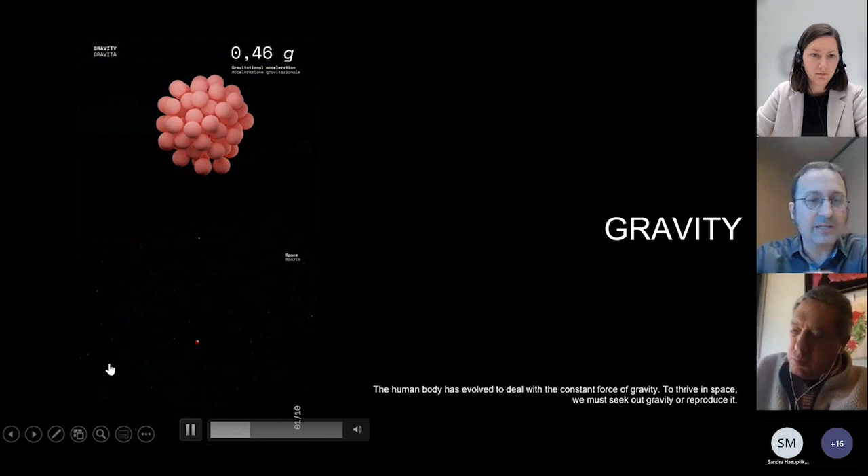So the first one is gravity. The human body has evolved in 1G, but as we go out into outer space, we can experience different forms of gravity: extra G's at liftoff, microgravity, 1/6 G on the moon. These are kind of like the 3 main destinations that we, as space architects, have all thought about: low Earth orbit, which we have a lot of experience with; the moon, which we have some experience with; and Mars, which is only experienced by our robots so far, and hopefully one day humans as well. Each of these spaces has a different type of gravity.

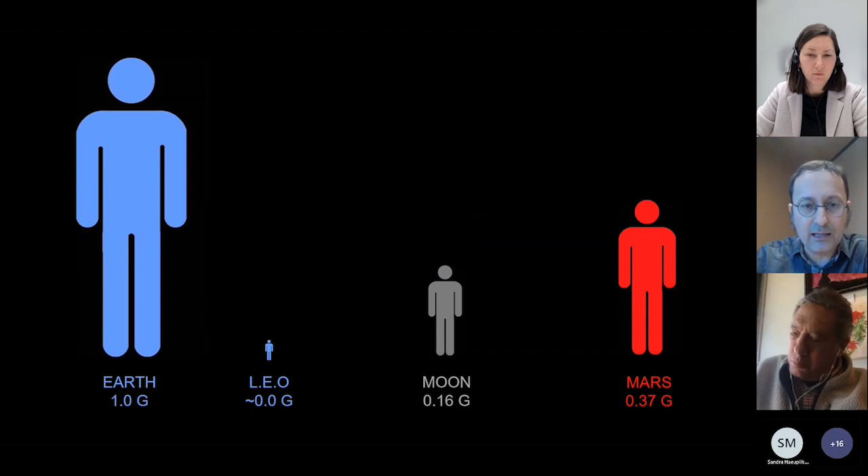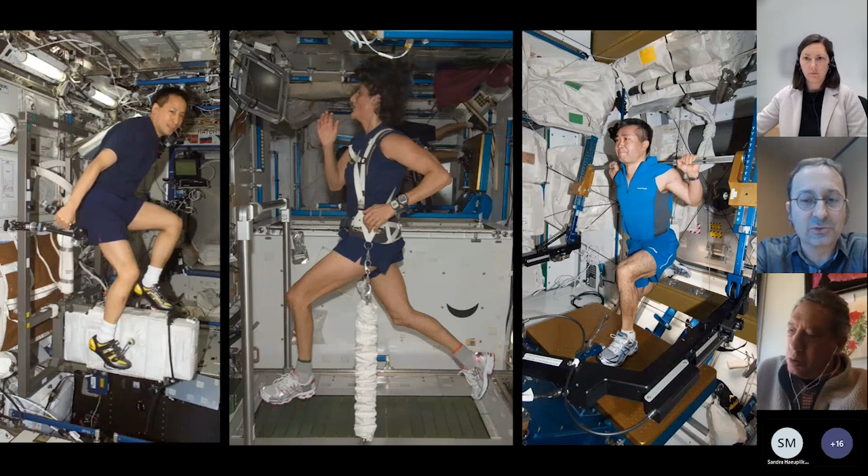In microgravity, in Earth orbit, you're kind of falling with your habitat, so you have this perception of weightlessness, which is a lot of fun, but it's also very detrimental to a human body. So our astronauts spend a vast amount of their time exercising and trying to prevent the degradation from the microgravity.

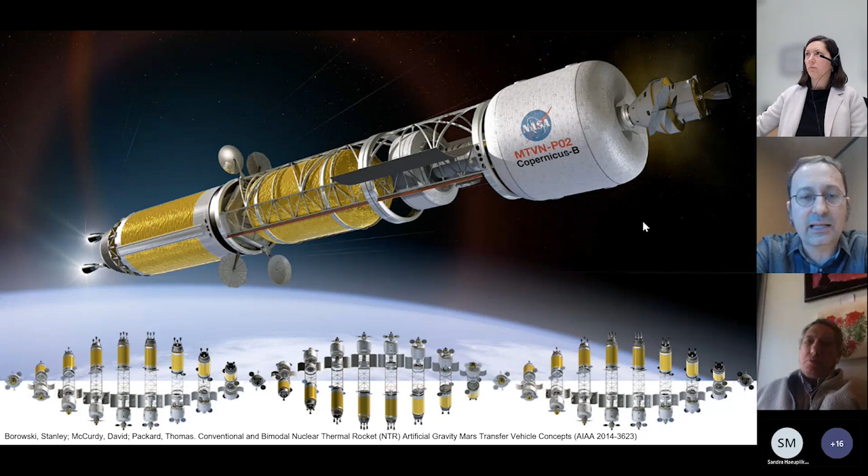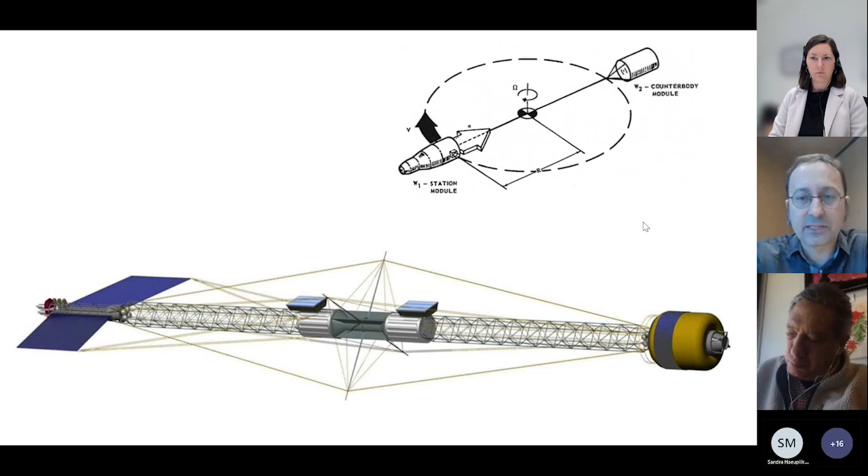Space architecture has been imagined for a long time of how you could combat that, right? One idea is to spin the habitat around and produce artificial gravity—von Braun, 2001: A Space Odyssey, O'Neill settlements. In reality, this has not come to pass, and it probably won't come to pass for a while because of the vast amount of matter you have to bring up to low Earth orbit. More realistically, you would probably use the rocket as a counterbalance and just spin your habitat around. The wider you make it, the longer the radius, the more gravity you could get with a lower spin. So these are some ideas being explored by space architects of how to create artificial gravity.

But once you get to your destination, you have to make sure everybody survives the harsh habitat. On Earth, if there's an issue with a part of our building, our codes, our architects, the goal is to get everybody safely out of the building. If you're on the moon or Mars, chances are that the outside is actually more deadly than any emergency you would have.

And so your habitat has to be resilient in the sense that if there's any issue with one part of your structure, it should not separate or cut off the rest of your habitat from the livable parts. You can't have any single point failures. It should be efficient and easily expandable because we hope to create long-term settlements, not just one-off visits to our destinations. So we've looked at a lot of different precedents in how humans have been constructing new habitats on Earth for a long time.

Grids are popular systems. There's the Law of the Indies, designed basically out of Madrid, that would be applied to all cities and colonies founded by Spain. So if you go to Latin America, a lot of the old cities have this grid lined with the Plaza Mayor in the center, the church and the governor's house, and a radial grid coming out of there. In the United States, west of the Appalachians, there was the law passed by Thomas Jefferson, the Public Land Survey System, which divided all of the land acquired by the U.S. into mile by mile squares that are further subdivided. So the Jeffersonian grid is another example.

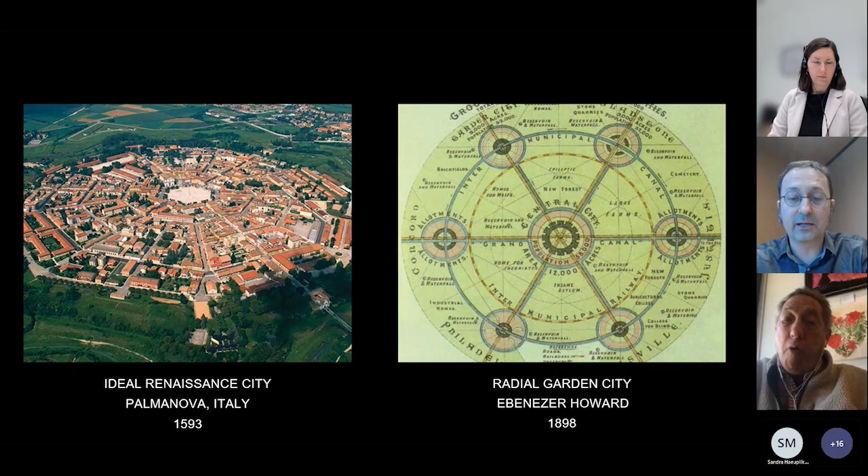We looked at radial cities, the Ideal Garden City by Ebenezer Howard in the Industrial Revolution.

But judging them on all these criteria, this master plan idea of the linear city, first articulated by the Spanish architect Arturo Soria, made famous by Le Corbusier, is very appropriate for outer space. It was an idea of how you could grow cities around all of this new technology, transportation, and infrastructure coming out of the Industrial Revolution, with bands of development that could grow and connect central points.

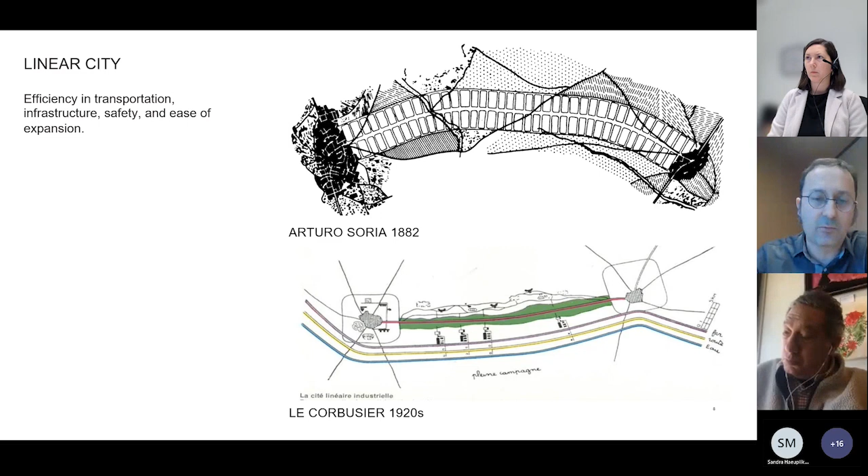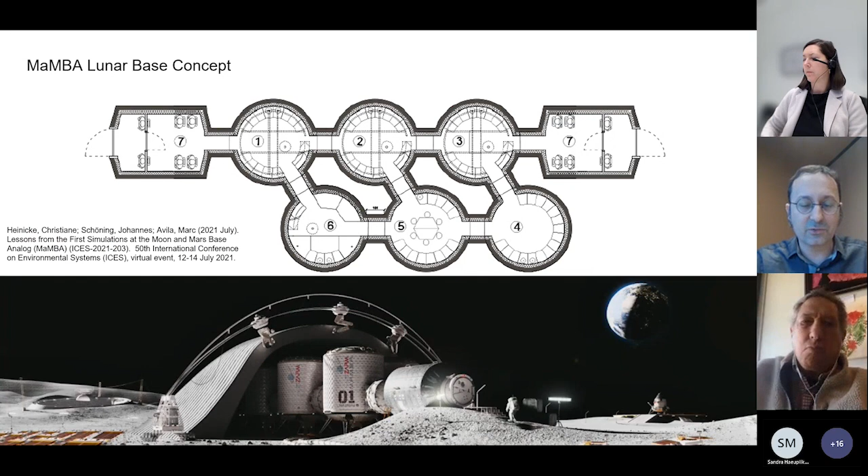So I explored this first on the Mars Home project, and we did have this double band pattern that could expand in each direction, interconnected as often as possible.

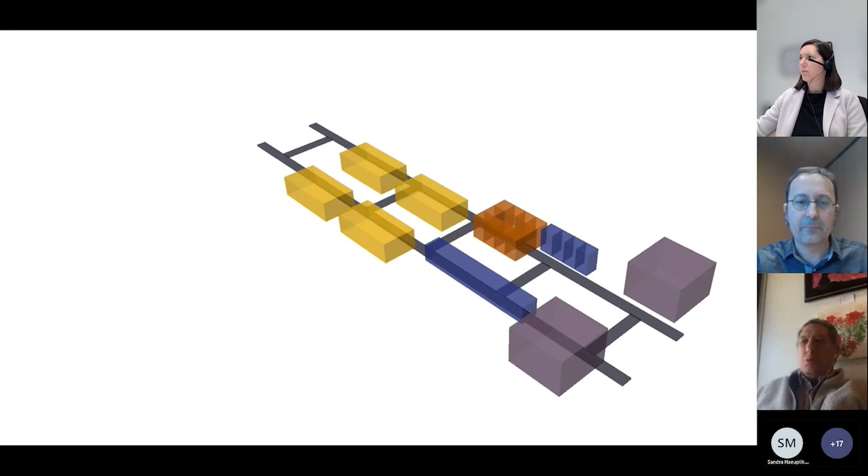We arranged all of the program, all of the different spaces, along these two bands. Part of the idea here was that one of the bands would be buried under masonry structures where the pressure is balanced by the overburden deep in a hill, and then a series of pressurized elements reaching out towards the surface, having access to the vacuum outside. Here's a section of the two bands going in and out of the page.

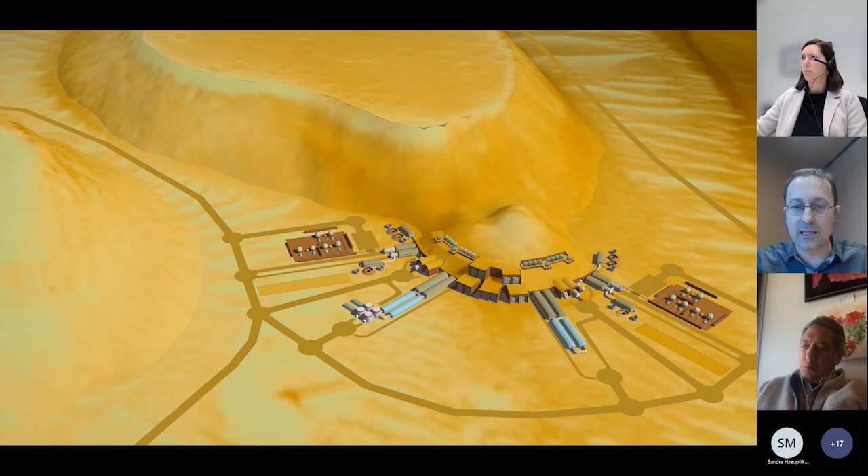If you have your design, it's really easy to keep expanding and replicating this pattern around. In this case, we decided to do it around this hill.

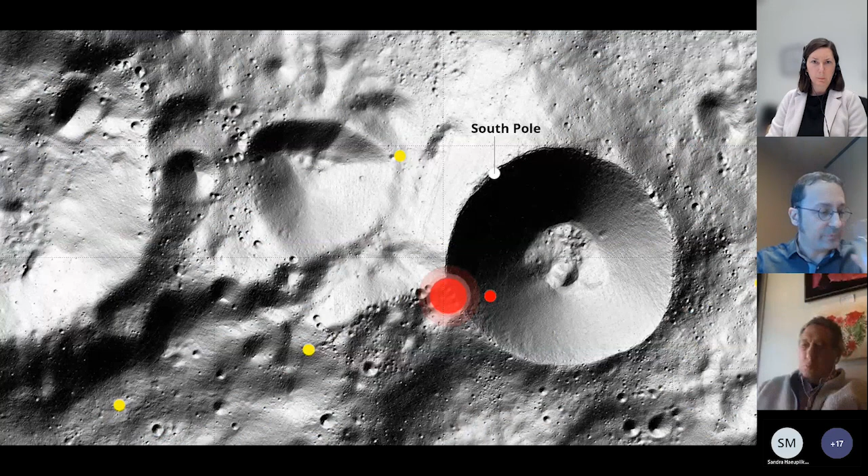For SOM's Moon Village project, we again started with our location on the South Pole. Probably most of you in the audience are familiar with why the South Pole of the moon has become so interesting in the last few years—because of the availability of light and the availability of probably a lot of interesting frozen material in the permanently shaded craters, which are both interesting scientifically and interesting because they're a usable resource on the surface of the moon.

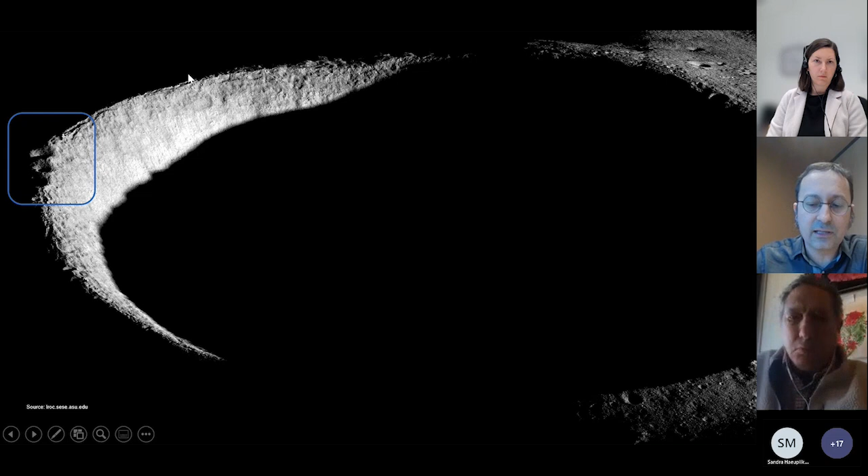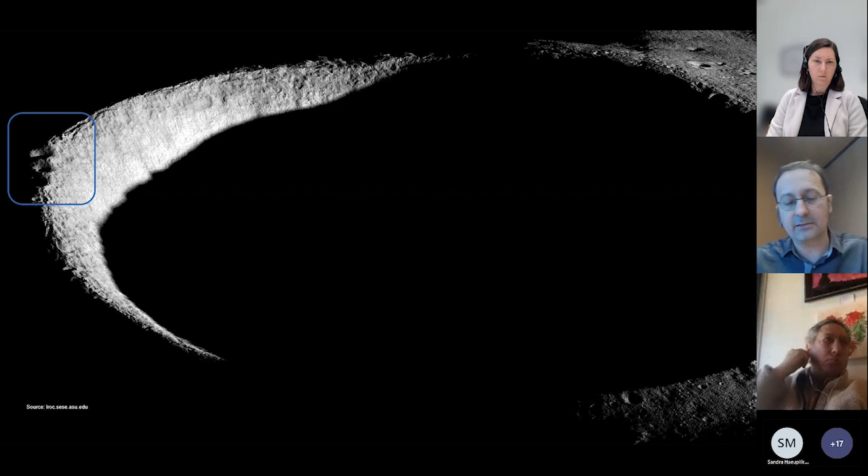The South Pole is dominated by Shackleton crater, which is pretty massive and deep. But along its perimeter, there are actually a lot of smaller depressions that are also permanently shaded. These could have very interesting material scientifically and exploration-wise, but are also much more accessible than the deep crater.

So we laid out our master plan in these bands. First, a habitation band where all the habitable modules would be, positioned along the perimeter, looking both into the crater and also out. Then we proposed an infrastructure band where all of the power generation and external life support systems would be housed. And finally, an activities band.

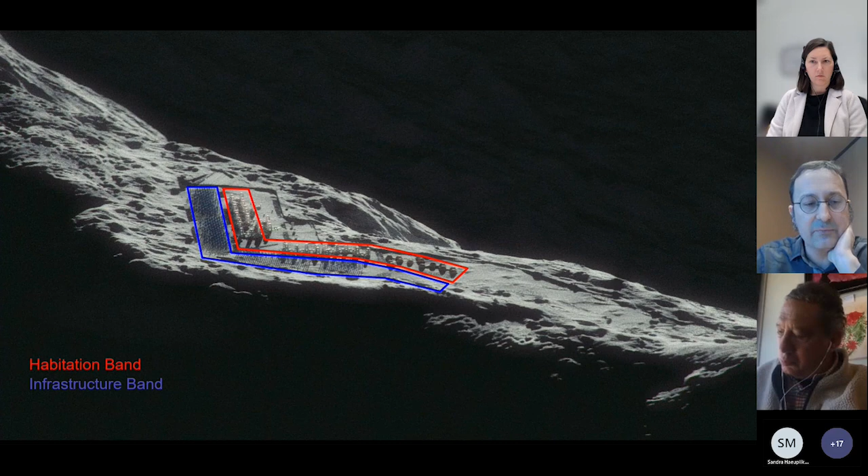The idea for the Moon Village was that you would take the precedent of the International Space Station, where instead of each country competing separately, there is a shared infrastructure that each country or entity could tap into for their needs. So for a moon village, for example, you could have a government organization preparing to do long-term exploration and use part of this activities band to stage that exploration. Next door, you could have a tourist company providing sports and entertainment activities outside on the moon. So the idea is that we share the infrastructure, but you could have many different activities taking place at the same time.

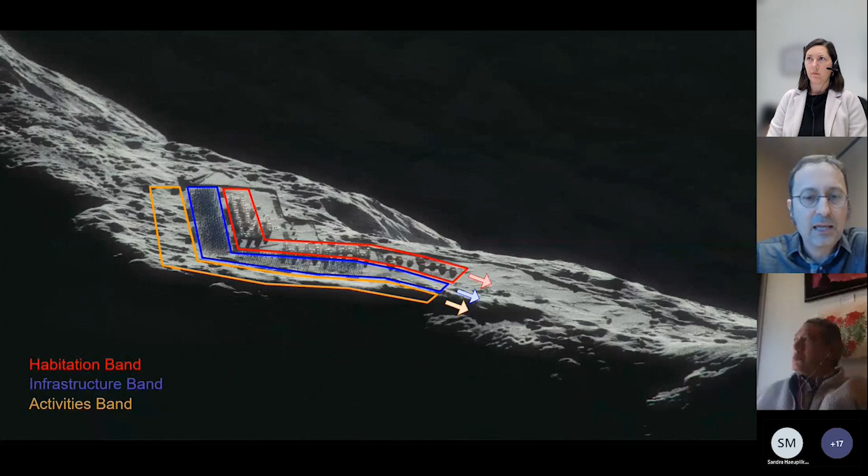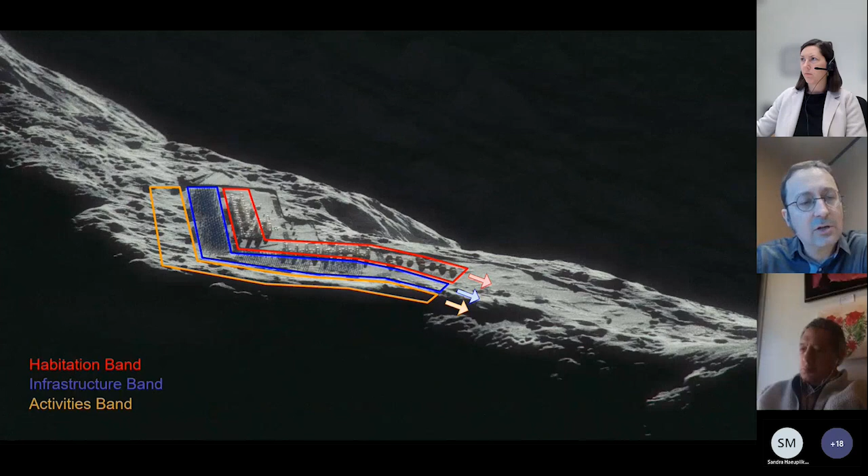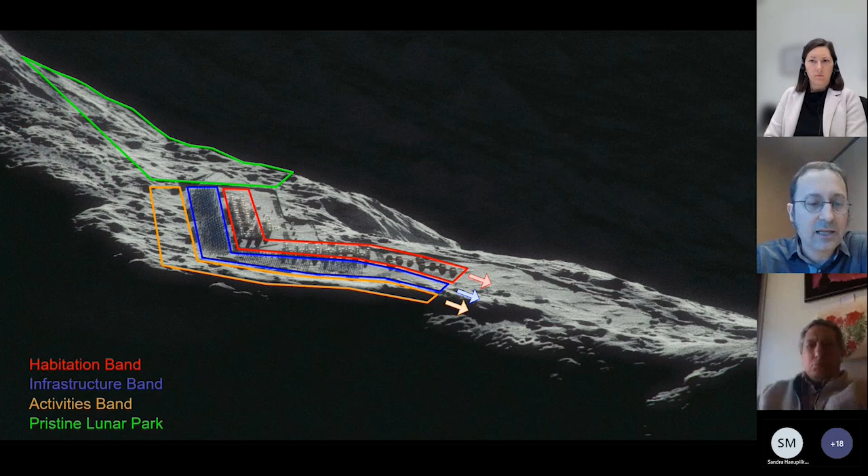So we were thinking that for the moon village, a good idea would be to leave a bit of the moon as pristine as possible, untrampled by footprints or tracks or infrastructure. And that would be the image that would be shared by the moon village.

And we decided to position it in a way that is facing towards the Earth. On the moon, because of the orbit and because it's locked, as you're standing on the surface, the Earth is always sort of hovering in one space on the horizon. Throughout the year it sort of wobbles a little bit back and forth, but there's only one direction where you can see the Earth. So we thought this would be a poetic gesture to put the pristine lunar park in a way so each of the habitats can look at the Earth through this pristine, uninterrupted part of the moon as well.

Now that you have your settlement planned, you have to deal with the fact that everybody's going to be living mostly inside. On Earth, we have a variety and richness of spaces in our cities and daily life - places for one person to be alone, for one person to meet with somebody else, and for small groups to meet together, and then spaces for the whole community.

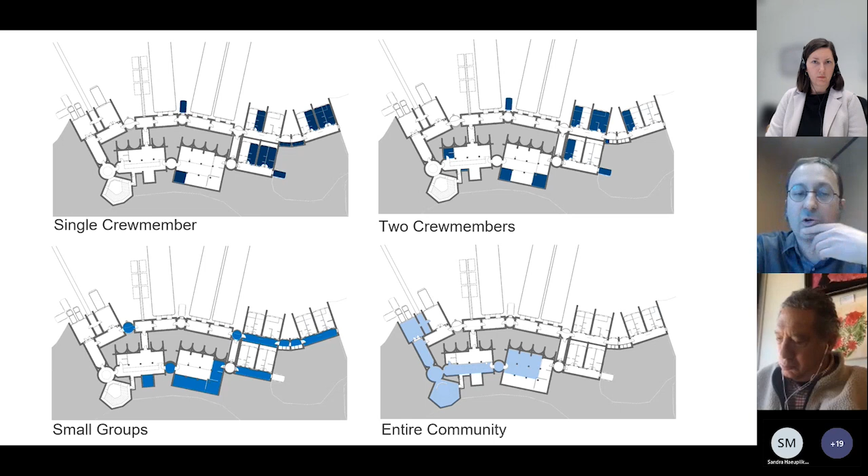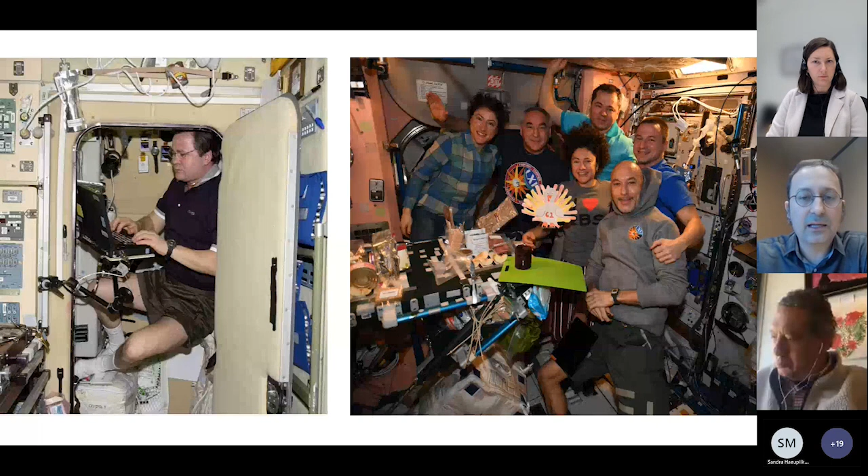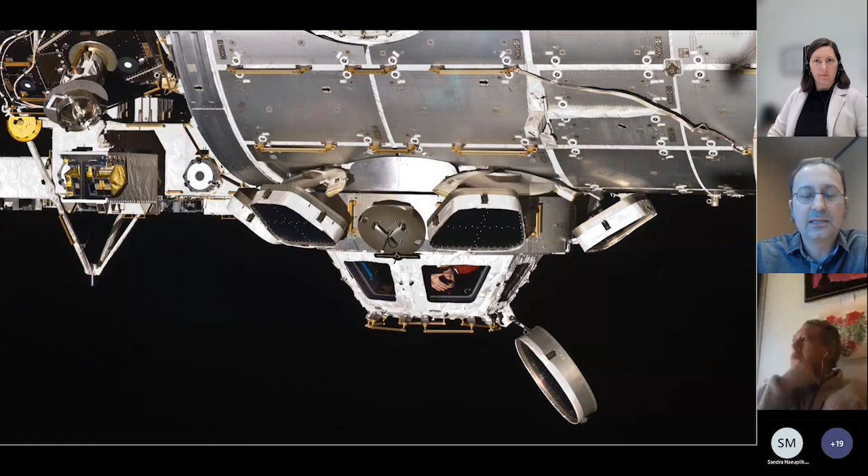The other very important part about dealing with confinement is the view out. You have to be able to see outside, and making windows is extremely hard from an engineering point of view, but extremely important from a design and human point of view. And the cupola of the ISS has really become the icon for this - the place where you can really go out and experience the world outside of your habitat.

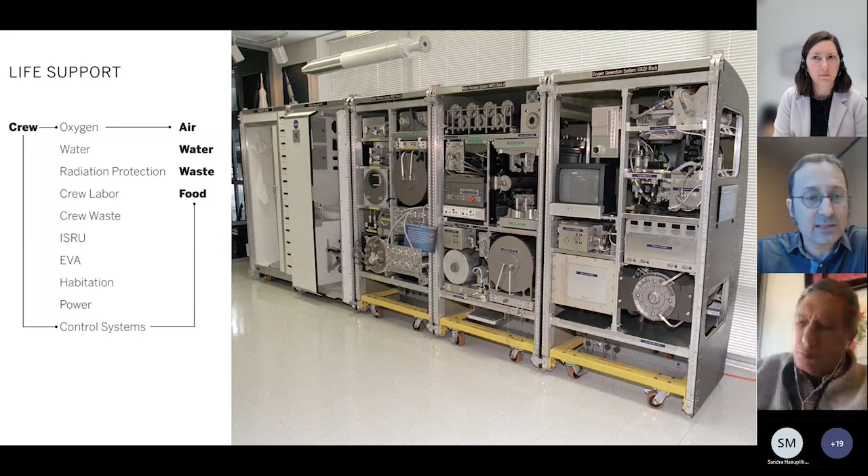This is the life support system on the ISS. It's all a bunch of equipment that is trying to close the life support system, as closed loop as possible, but it's all machines. There are projects trying to introduce biology into this loop, and the MELiSSA project by ESA is one of them. But besides the life support, plants are really integral to human well-being.

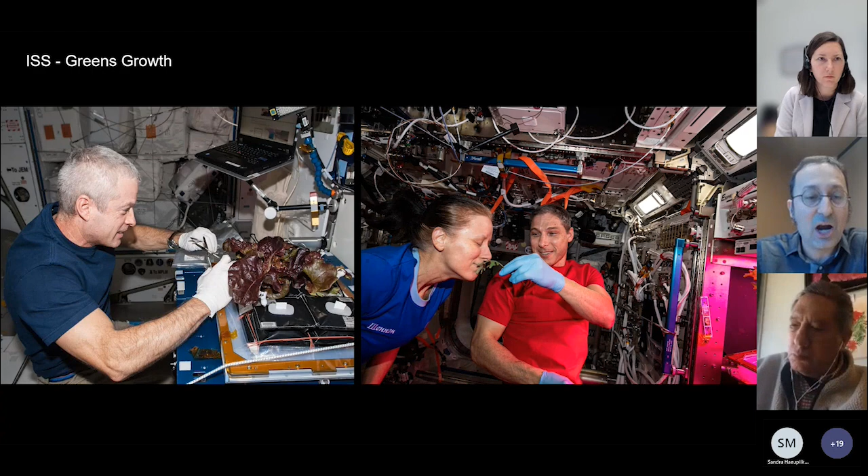In the last few years on the ISS, every time they have an experiment with some kind of plant, the moment where they harvest the product is a moment for celebration. You get a sense of accomplishment. You get the smells, the feel, the fresh food. So the integration of plants into space habitat is a very, very vital question.

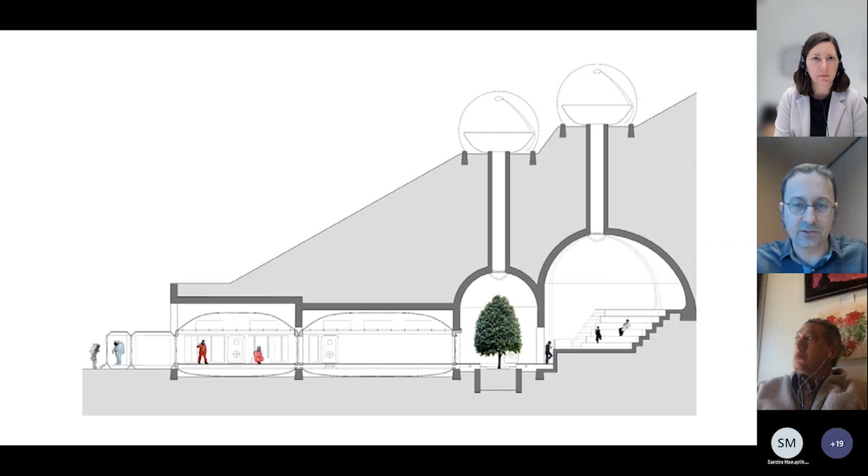On the Mars Home project, each of these spaces along our master plan also had an idea of how to integrate greenery into it, whether it be the crew quarters or the gathering spaces or the greenhouses. We even had this idea of the first tree. You would plant a tree that would keep growing with the settlement, and as new people arrive, they would have their picture taken at the first tree as a symbol of the growth of the settlement. So you can come up with various interesting ideas of how to integrate plant life.

On our Moon Village module, because this was an earlier stage, we designed the first module. We had an experimental greenhouse as part of one of the levels.

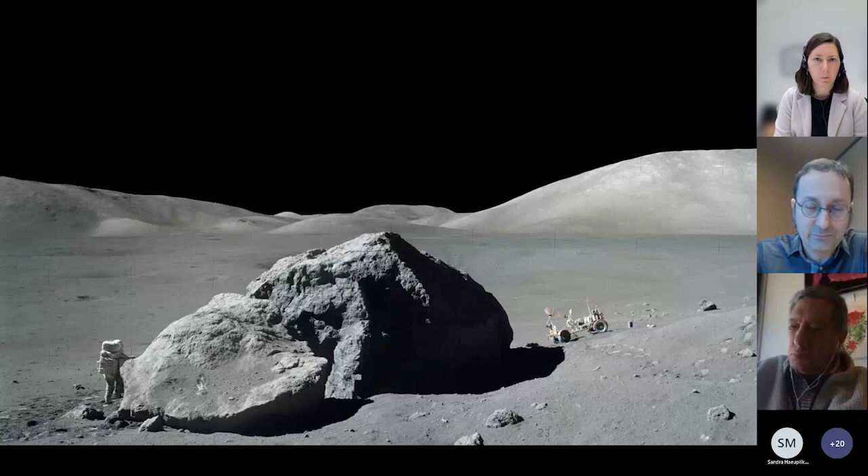Color is extremely important too. On Earth, we have a rich variety of color of the natural habitat, and it changes through the seasons and throughout the year in most places on Earth. Our main destinations, the Moon, is predominantly gray, but even Mars, even though it has a color that's not gray, it's still one color almost everywhere. And so in our latest project, we tried to introduce a lot of textures and earth tones in both the public space and the crew quarters.

Maybe an important part of this color scheme is to let each of the crew members customize the colors in their habitat, and maybe they could change and not be static.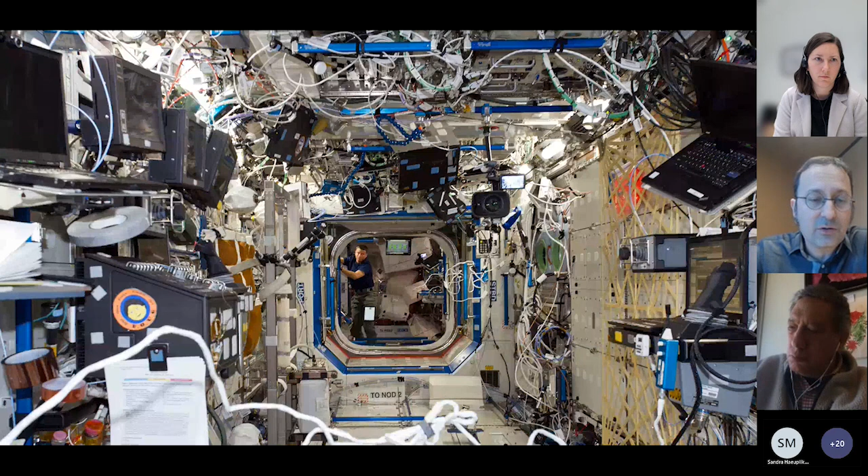On the ISS, color is not a big driver of design. There are moments like these from a few years ago where they had a celebration with a splash of color too. But the introduction of color and thinking about how it could be both emotional but also helping with orientation is very important.

Light. On Earth, a single day is 24 hours. On the Moon, we have the cycle of 14 days of light and 14 days of darkness. On the South Pole, you have an even weirder combination of large stretches of light, but also strange periods of darkness. This is very important for humans, the change throughout the seasons, but also change of the light throughout the day.

On a typical Earth day, we get a lot of different lighting conditions. On the ISS, the lights are simply on or off. So for our Moon Village, we partnered with a lighting design company, coming up with this idea that you could wash the walls in different types of lights. In the morning, you could start with warm light at the bottom. Throughout the day, the lighting strategy could change to more white light coming up from the top as people are active. You can cycle back to a sunset, warmer, taller colors in the evening.

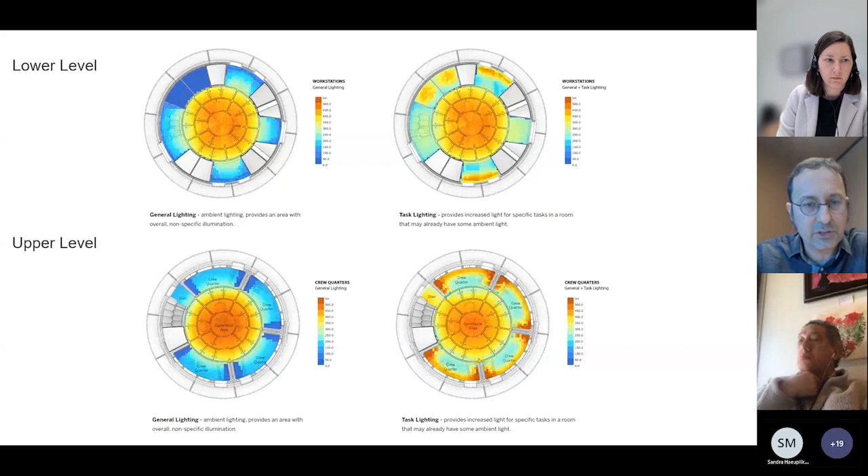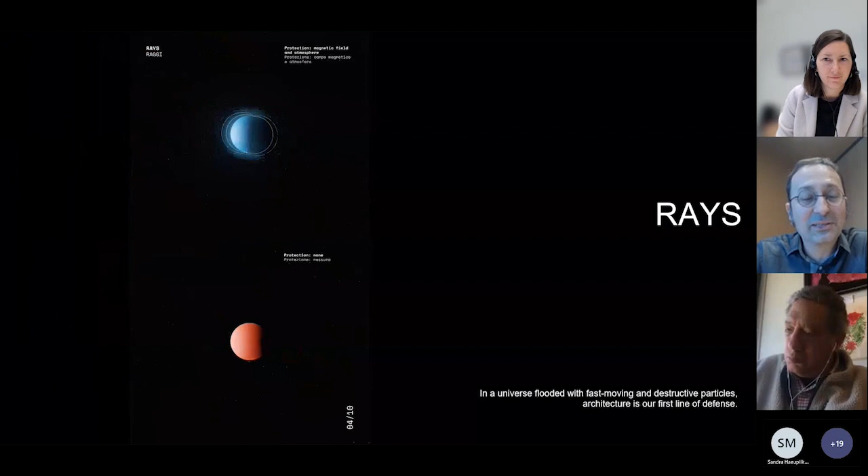Another important bit is basically radiation. The universe is out there, is a dangerous place, and it's trying to kill you all the time. On Earth, we're protected by our atmosphere and our magnetic field. Anywhere we go in space, it would have to be the architecture that protects us.

There's low-level radiation from cosmic rays and solar wind that are constant. And then periodically, our sun throws out a big solar flare that is a short duration, very high dose of radiation. But fortunately, it's predictable. We have space weather, and you get about an hour's warning for this.

So some of the strategies are burying the habitat with regolith if you're on a surface. More recently, examples like this from Hassell show you a 3D printed shell that would protect your habitat while also allowing views out.

It turns out that hydrogen is a really good element that protects against radiation, especially materials that are high in hydrogen. And one material that is high in hydrogen that you have to have anyway is water.

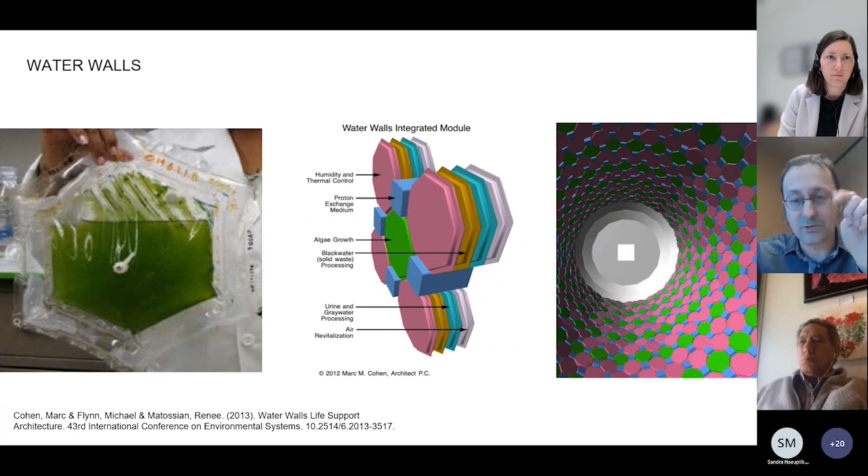So there's this very cool project trying to integrate the water cycling system of your habitat. Instead of it being a machine that's stuck in a corner, what if it's this thin layer that could coat the inside of your habitat? This was Marc Cohen, who is in the audience, one of his very cool projects.

So there's other ideas of how to put hydrogen all around the habitats. This is one from SEArch+, where they propose 3D printing an ice shell around the habitat.

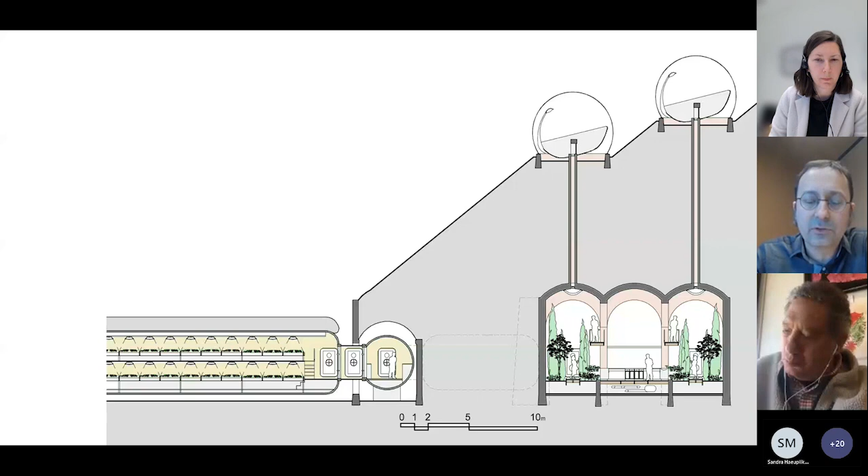In our Mars home, we kind of placed most of the habitat buried deep underground. And on Mars, you need about 10 meters of soil to balance the pressure and internal pressure. So that was used as the protection.

For our Moon Village project, there was a detailed study by some of our collaborators in ESA where they took our habitat and made a radiation model out of it and proposed several strategies. One is kind of partially burying the habitat. The other was this idea to have a protected part of it.

On the South Pole, as we've talked, the sun is always at the horizon. So the solar flares, all of the radiation, would come out at you at the horizon. So if you take the lower level of the habitat and provide, in this case we proposed, a 3D printed wall around it, then this could be your shelter where the crew could hide for the hour or so it takes the solar flare to pass through.

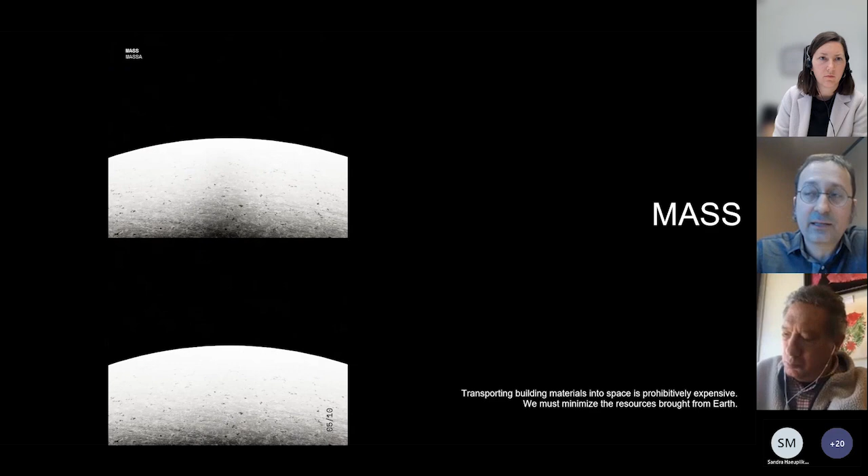Another important thing is mass. Transporting molecules from one gravity well to another is very energy intensive. So this is probably even one of the most stringent drivers for space architecture.

The legacy here is that everything that sort of started flying in space originally was really the top stage of a rocket. And in the case of Skylab, it really was the last stage of an unused Saturn V that got remodeled into the space station.

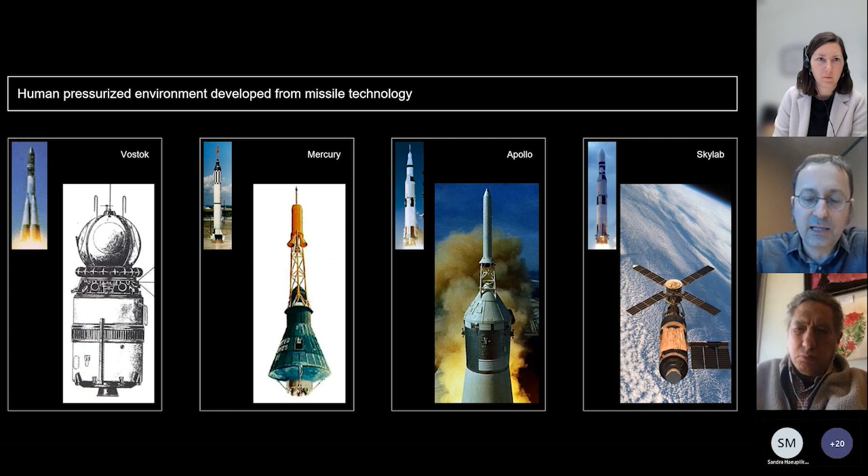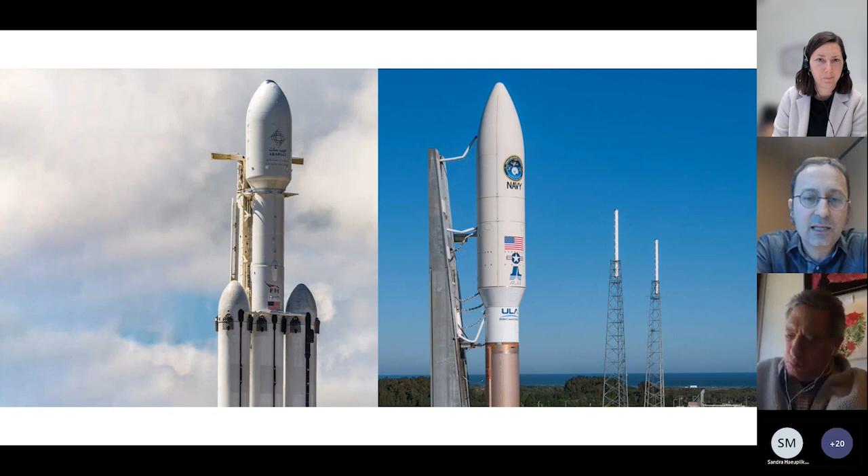But you have to fit everything that you're designing into the fairing, both the volume but also the mass requirement of the rocket. So all of your designs, for whatever you plan on putting on your rocket, you have to really think about how it will fit in the fairing, how it will be fit into the adapter, and measure all of the mass as well.

This is the rendering of how our Moon Village habitat would fit inside of a fairing. This is it folded in.

You also have to think not just about the rocket to get you to low Earth orbit, but also how you will get to your destination. And here we wanted to maximize the size of the habitat that would fit, which means that the actual transportation system would have to be something else.

Generally, as a rule of thumb, if you want to put something on the surface of the moon, your lander that takes you from lunar orbit down to the surface would be probably half the mass and half the size of, or as big as, the object you're trying to bring down, so half of the total.

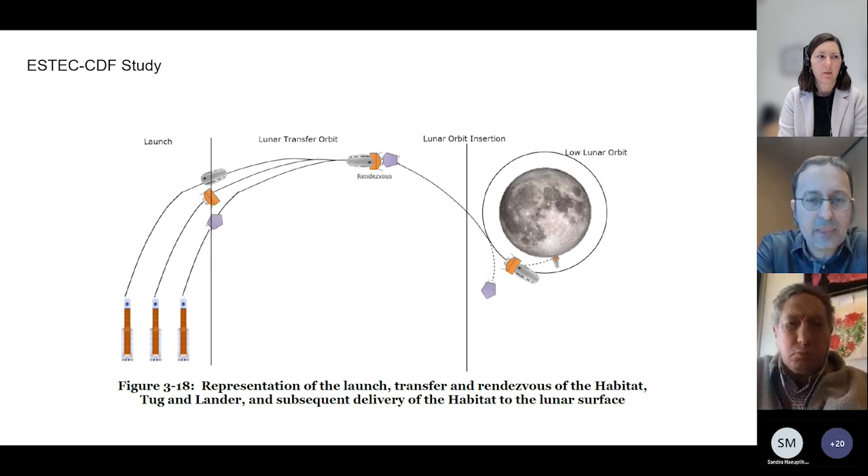So for our Moon Village proposal, we had this idea that the habitat itself would have no propulsion, but would go to low Earth orbit, be picked up by a lunar transfer vehicle, which would shuttle between the Earth and the Moon and take it to lunar orbit, where it would transfer to a lunar lander who would bring it down to the surface, and then it would get picked up by one of the rovers with a portable crane and bring it to its final destination.

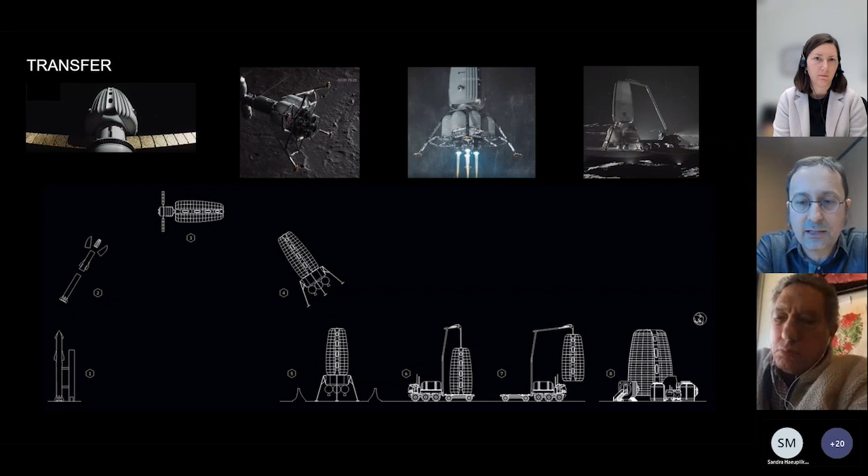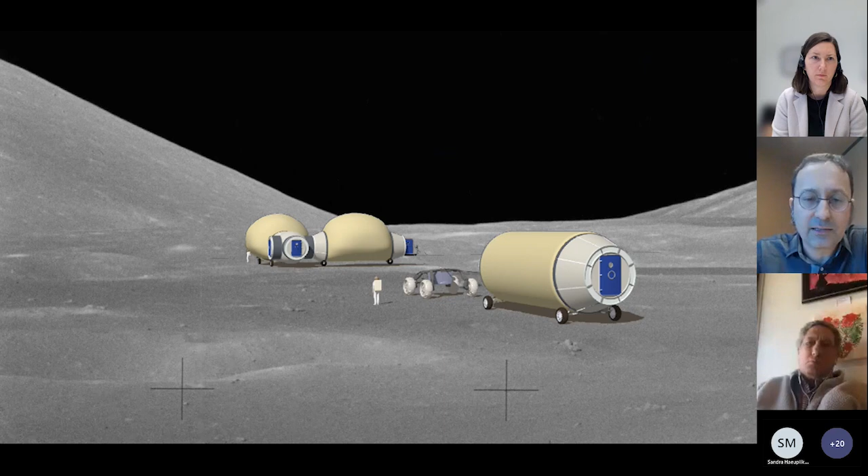Another cool idea is the sky crane that got pulled off twice now on Mars, where you have a lander with rockets that comes down, hovers over the surface, and gently lowers your payload down. There have been ideas of how you could do this with a human-rated habitat object as well. From our SEIM project, you land somewhere all folded up, and then you bring it with an unpressurized rover to your base that is growing.

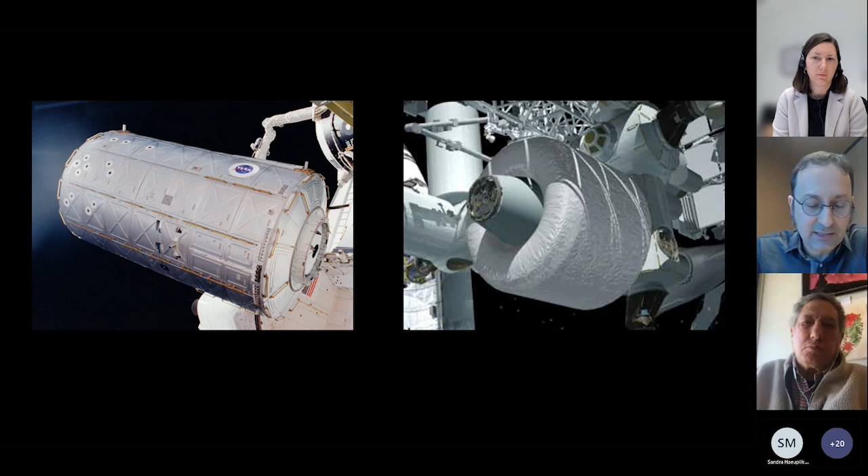There are two ways people have thought about putting things in rockets. There's the rigid modules that all of the ISS is made out of, made to fit inside the space shuttle or the Proton rocket. Or there's the precedent of TransHab, a design that Constance worked on back in the 90s with another space architect, Kriss Kennedy. The idea is you have a rigid central core which takes all of your loads during launch and transfer, but once you get to orbit, you can contain the atmosphere with an inflatable shell that comes out.

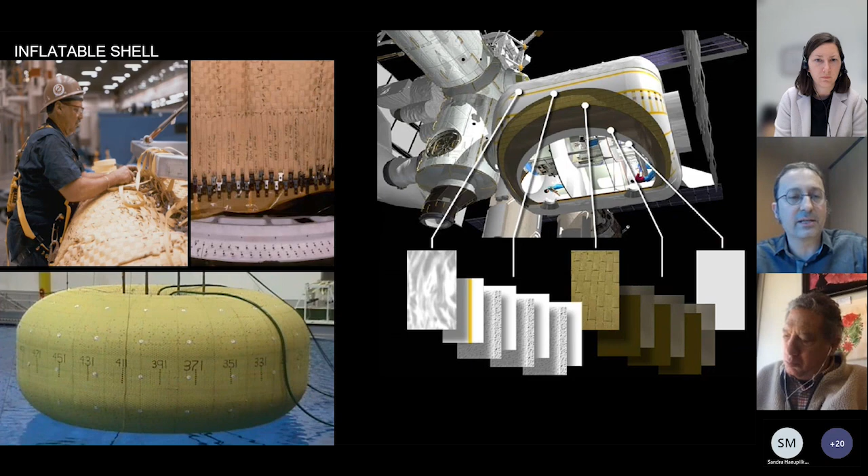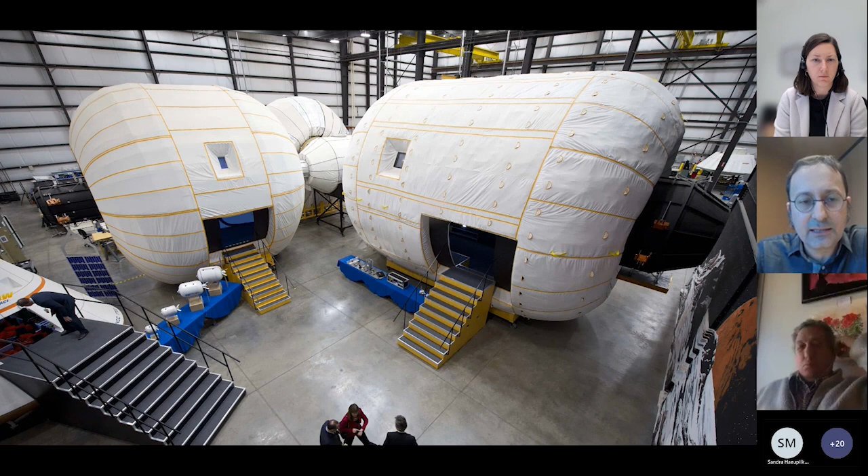This is a precedent that's inspired a lot of work and a lot of space architects. It was tested to full scale at Johnson Space Center, showing how it would inflate. In the last 10 years or so, the company Bigelow Aerospace has taken this idea and developed it further with some large-scale mock-ups. They currently have a sample module attached to the International Space Station, mostly used for storage right now, but also as a test of the technology.

And in the last 2 years, Sierra Nevada has really taken up the flag and pushed the technology even further with full-scale mock-ups. Recently they had two engineering mock-ups where they inflated it until it exploded. So I recommend going to see those.

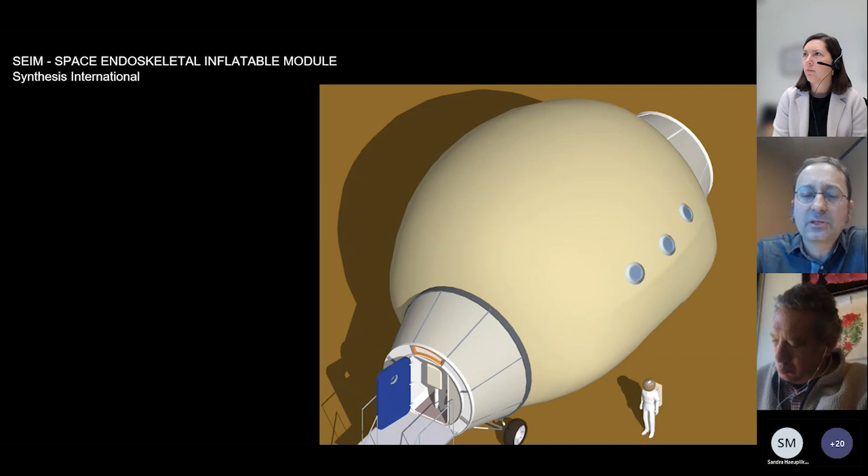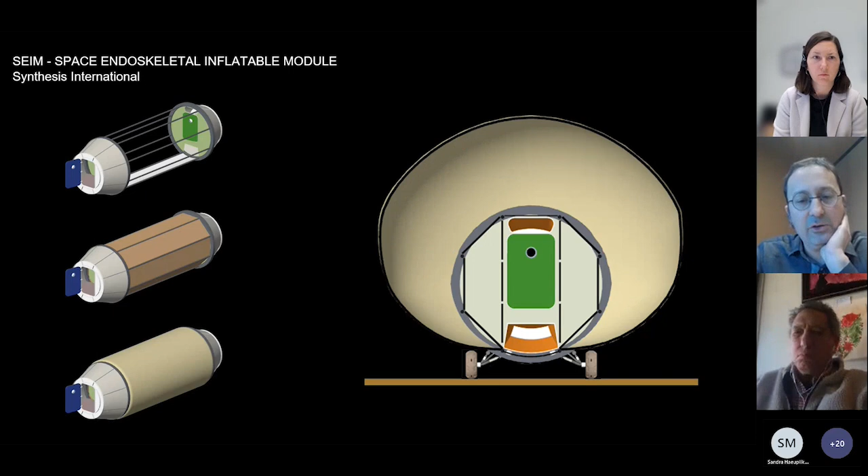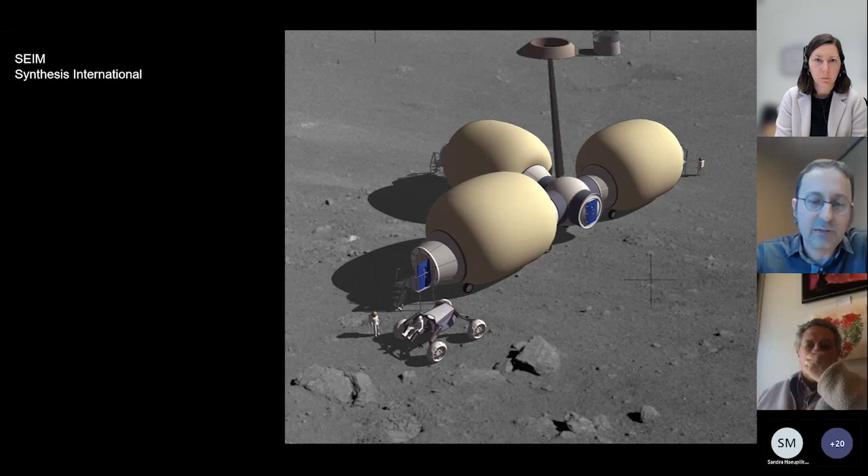In my experience, my first attempt at developing new ideas was to take the TransHab and try to adapt it for a surface condition. The TransHab is in a vertical configuration, and Constance and I worked on how you would take this and adapt it for a horizontal configuration. Here's all of the rigid elements packed together during launch, and when you get to the surface, you could fold them out and create your walls, panels, and floors. Then we spent more time afterwards optimizing the shape of the inflatable, and this was how we were imagining growing a settlement out of these SEIM modules.

But from an architecture point of view, how is that important? If you have a rigid capsule like the ISS, you have the fairing of your rocket, and then the shell that contains your pressure, and you're basically architecturally left with a cylindrical monospace. A lot of people have thought about how to divide up this space, and there are creative ideas, but this is what you get. On the TransHab idea, you have the rigid central bit, and then when you go to space, you inflate your pressure shell, and then the architect has this sort of torus space to work with.

So for the Moon Village, we thought, well, what else can we do that's possible? What if you put the central rigid structure that's carrying your loads during launch and integrating your life support system on the perimeter, and inflate 3 shells from there? Then you would free up the central space and you would have one continuous space that's a lot bigger to work with. So this is kind of what we did for our design: we have this 3-part layout with 3 shells and a big central space on every floor.

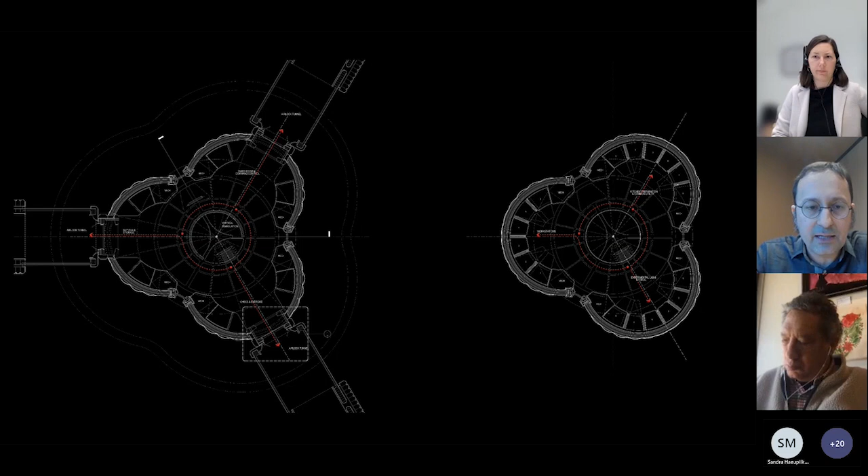We divide it into 4 floors in this case: a workshop, a lab, crew quarters, and the garden that I mentioned. The idea is that as you grow the settlement, you would start specifying different programs for different modules, just like you do on Earth, where you have different buildings for different functions. We decided to concentrate on the design of the first one, and by definition, the first one has to have everything in it. But we were envisioning that later on you would get one of these that would be entirely your lab, another that would be entirely storage, another that would be entirely crew quarters, and so on and so forth.

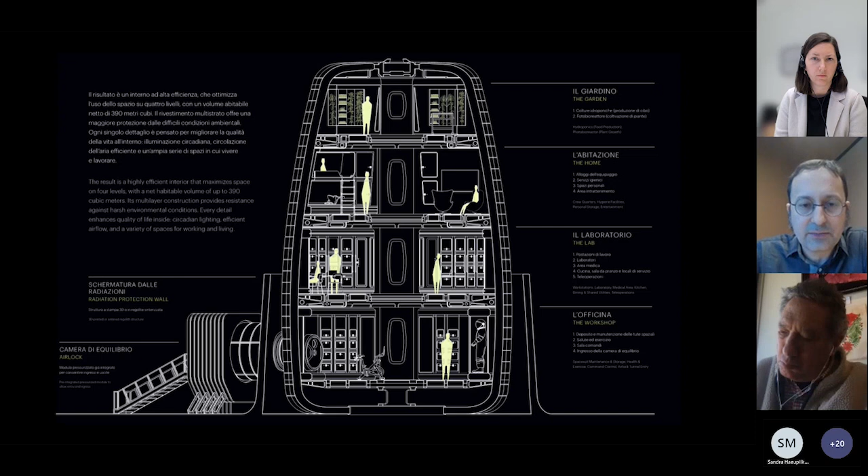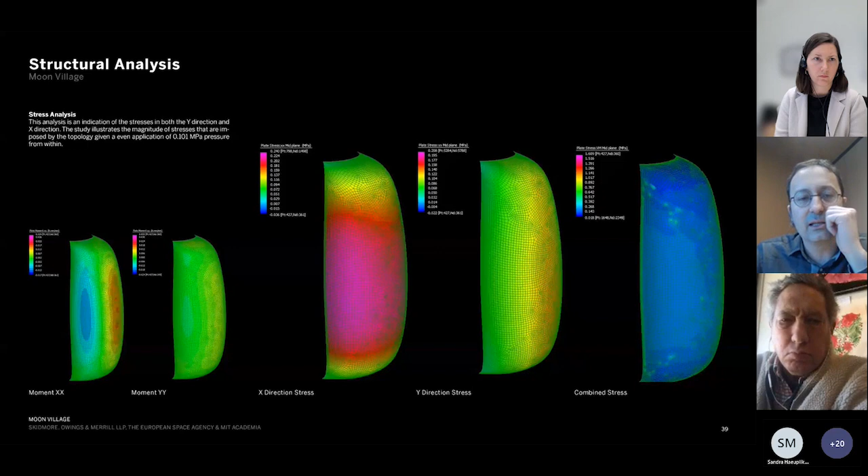Here's the section of the 4 floors that we laid out the space on, with the circulation through the center in this open space that's continuous. We also thought about how you would fold out the floors and worked quite a bit on trying to come up with the correct geometry for the shell.

Another consideration I've alluded to is the extremes in both temperature but also pressure, and how you contain the pressure is important. We have this classification of space habitats invented by Mark years ago. Class 1 is pre-integrated, everything ready to go, and you send it to your destination. Class 2 is modular elements like Mir or the ISS, where you build them slowly over many different launches. Finally, class 3 would be habitats built using materials you find at your destination.

But in all of these, the main force you're trying to deal with is containing the internal pressure, because most of these destinations are, for all practical purposes, vacuum. Just to give you a sense of scale, you're probably sitting somewhere on Earth on a floor, and usually we design these floors for 2 to 10 kPa of pressure from gravity. Depending on what kind of atmosphere you want to hold in your habitat, the order of magnitude higher is what the force is to contain the pressure. The pressure at sea level is 100 kPa, and even if you decide to go with a lower atmospheric pressure than at sea level, it's still enormously higher.

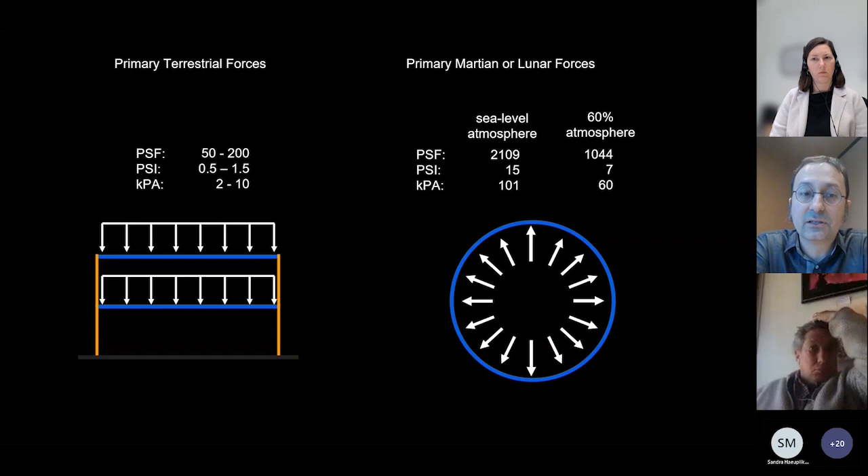And so that's why you have these cylinder, oval, and circle shapes that you have to deal with, because it's very hard to contain pressure through bending in flat surfaces. You always have to take it in membrane action and tension in your shell.

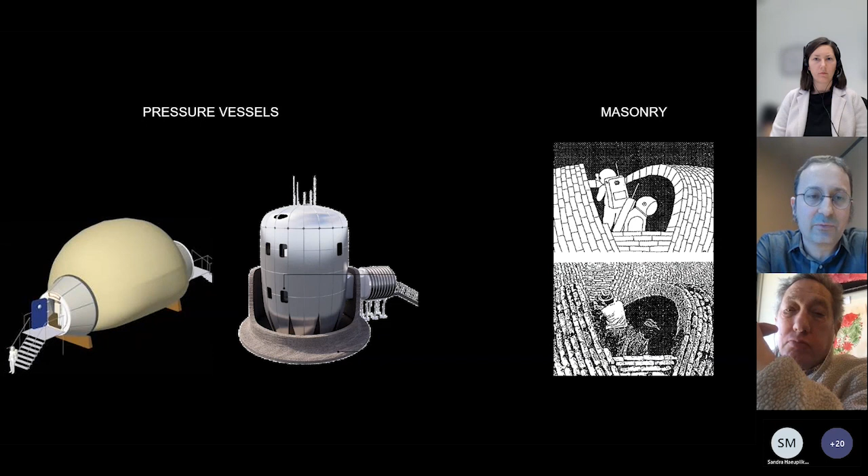So when I first started thinking about space architecture, these were the things we could work with. There was a lot of precedence for pressure vessels, and people were thinking about inflatables. But there was also this idea of building with masonry and covering up the pressure by burying your habitat under the weight of regolith. There are historical precedents of how you could build efficient vaults by leaning the arches, without needing any centering.

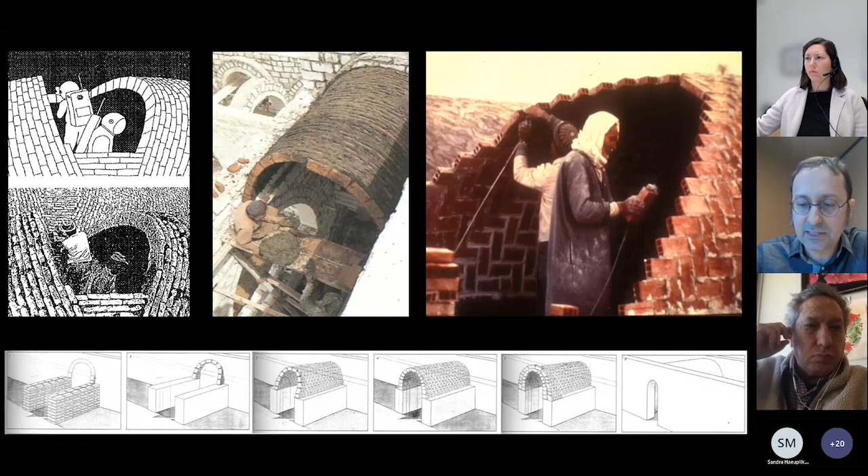This image on the left was really captivating for me, by this architect Hassan Fathy, who was thinking about how to adapt this to outer space. You can also do domes.

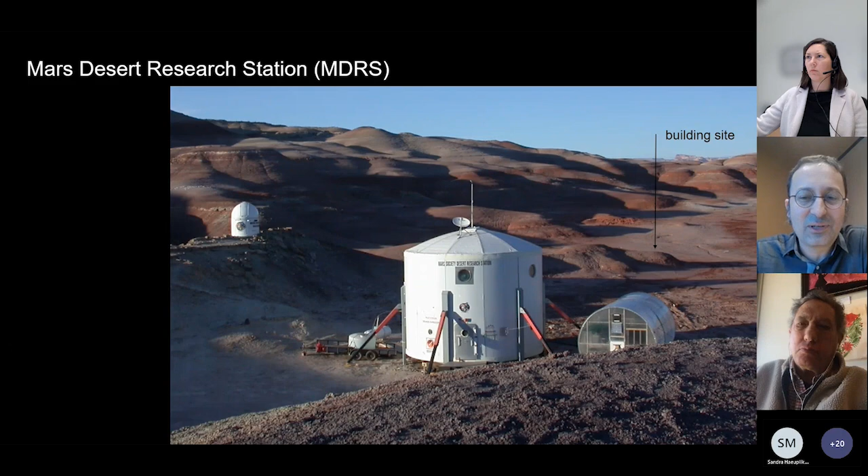This was actually my first built space architecture project. I was one of the early crews of the Mars Desert Research Station, where the project I brought to my crew was to try to build a vault. So here we're collecting our material, the in-situ local material. We have our pressurized rover that we use to carry the material around. And then, in simulation spacesuits, we built this vault.

Here is the final product. This is my first structure after graduating. But all joking aside, here you have your class 1 habitat that you brought from Earth, and you're trying to build your class 3 habitat out of the local resources.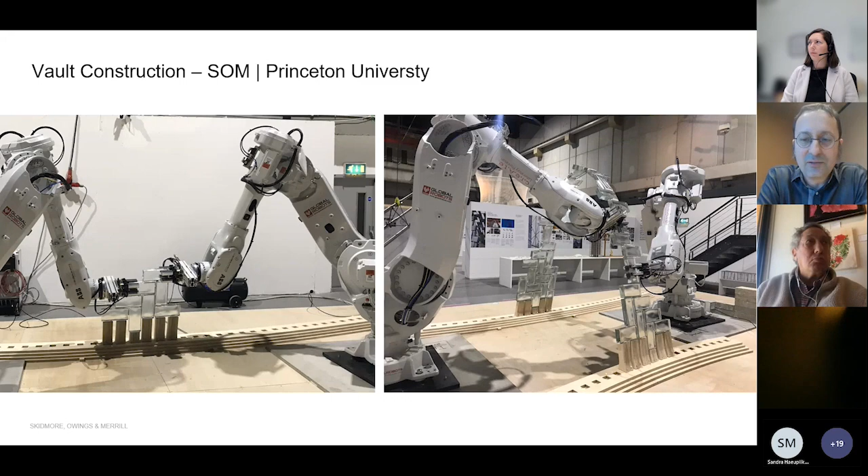In reality, laying bricks in spacesuits is not the right way to do it. One idea to make it easier is maybe you could have a pressurized construction tent that you could at least work in with a shirt-sleeve environment, not in a spacesuit. But really, if you want to do stuff like that, you would not be spending astronaut time, which is extremely precious, laying brick. The analogy I think of more is the idea of a master mason who lays out the main course and sets the parameters, and then has apprentices filling it out.

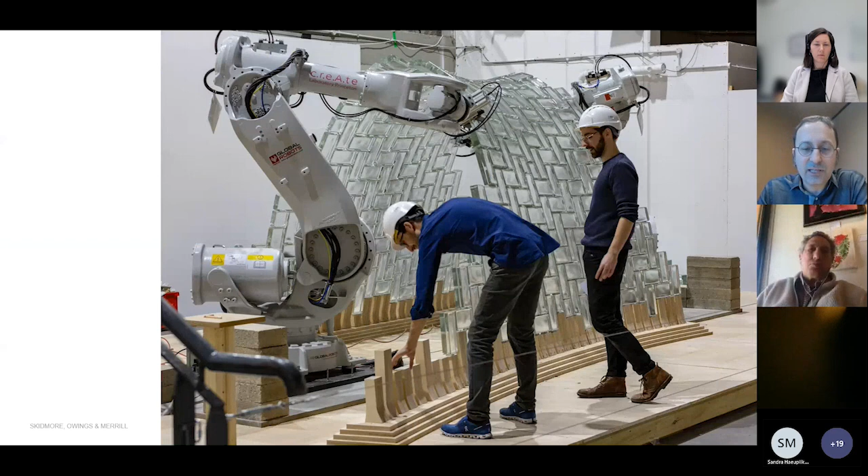So the idea would be that humans would be kind of guiding the robots, or at this point probably even automated, to create a habitat. This is a project that we at SOM did in collaboration with Princeton, to see if we could get 2 robots to collaborate with humans to build a vault.

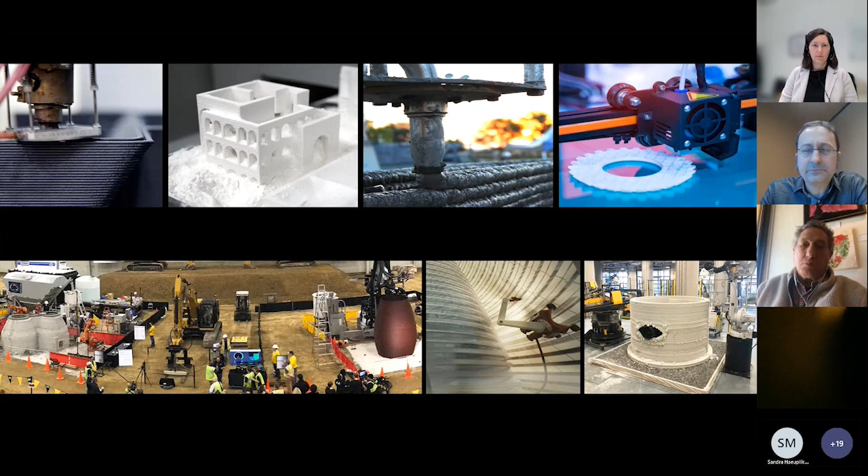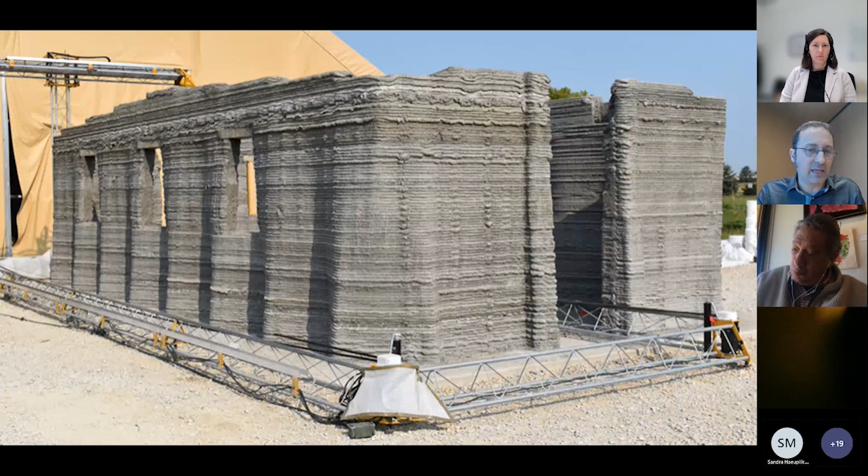In the last 10 years, additive manufacturing has really gained a lot of traction and interest, and there's a lot of competition that NASA has already sponsored, trying to figure out how we could use this technology to help us build in space. This is a project we did at SOM with the Army Corps of Engineers to 3D print concrete. This was the winner of the first NASA 3D printing challenge, the Mars Ice House by SEArch+. This was their further iteration in phase 3 of the NASA 3D printing challenge. And this is another one, in collaboration with Icon, the 3D printing company.

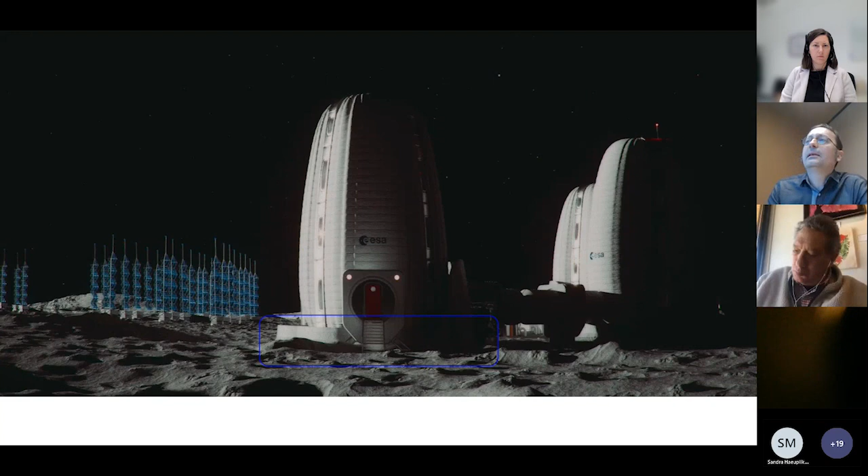In our research, I think 3D printing it's hard because as you layer the material, there's inherently...

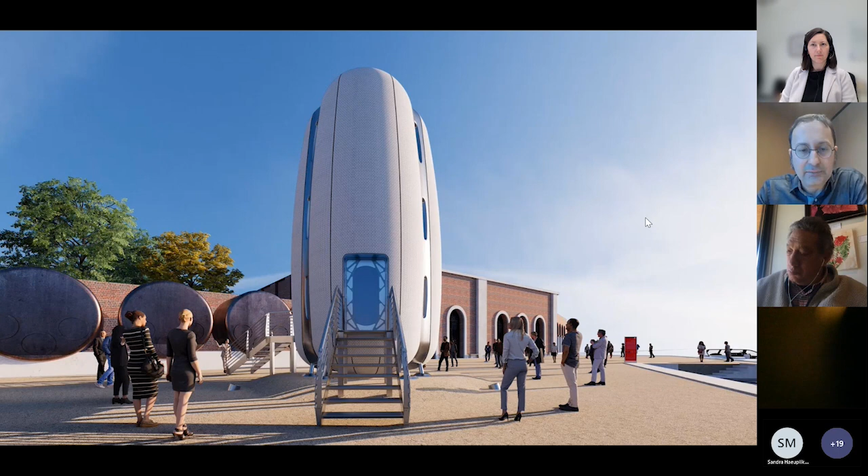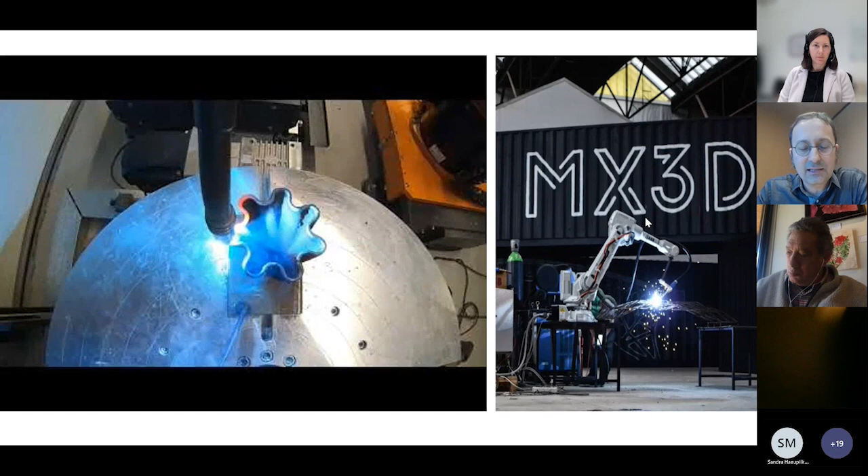So for our project, the Venice Biennale invited us to build a pavilion where you could walk into our Moon Village habitat. This is what it would have looked like. We had to rescale it a little bit from a design for outer space to a design for an exhibit on Earth. But we partnered with MX3D, this company out of Amsterdam, who are famous for this 3D printed bridge. Here's the Dutch Queen opening it.

And we decided to explore this technology for the floor. So this was one of the floors of our habitat with the 3-part diagram that I showed you, with the structures, the vertical elements at the corners. And we used some of our form finding techniques to figure out where is the most efficient place to put material.

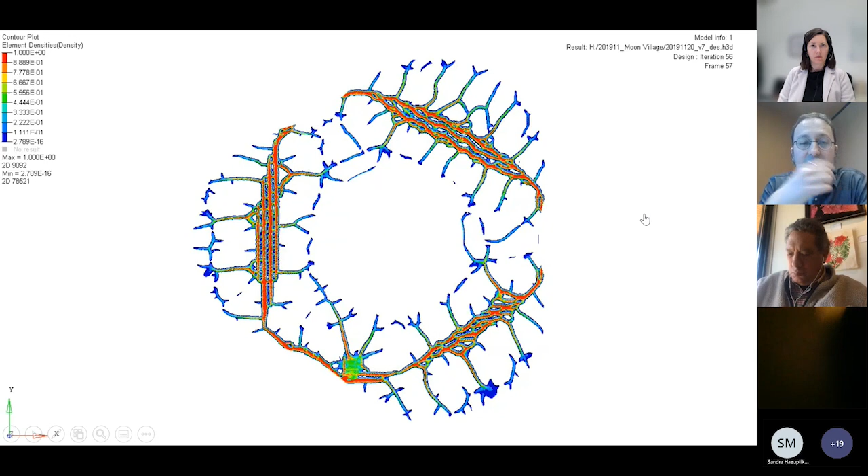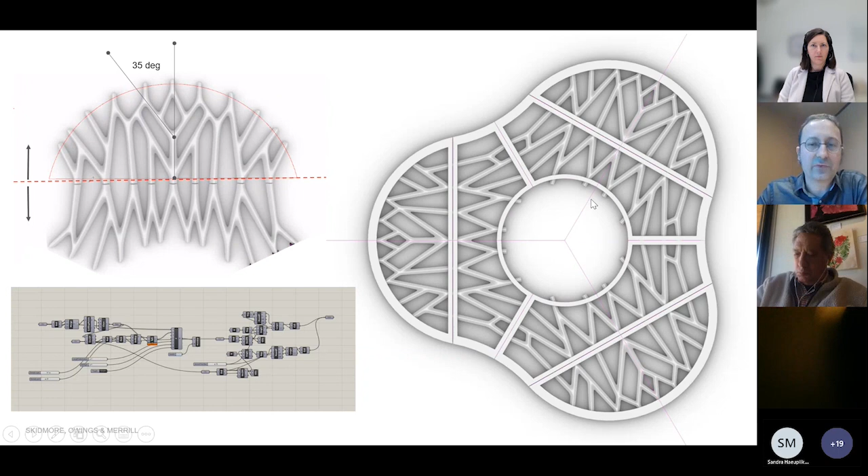Obviously, you can't take this result and just 3D print it. So you have to go through a few steps of rationalizing it. You also have to adapt it to the technique and the capabilities of the manufacturing process. So one of the criteria is that as you're laying molten metal, you can't have things that are more than 35 degrees off of vertical. So we had to kind of adapt the geometry to match that constraint.

And then we have to really think about how the robot is going to build it, and whether our thing would fit within the reach of the robots. So we did a lot of studies and optimization of what the correct piece is, and how it would really be fitted with the robot.

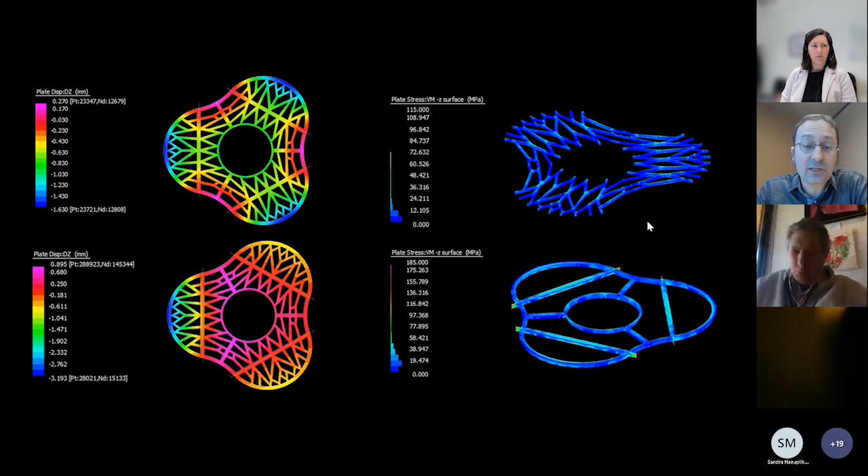We also did a lot of structural optimization. There were different thicknesses of weld you could do, different speeds of the welding, different thickness and depth of the members, in order to come up with the lightest possible structure. Finally, all the joints and how the branching happens during the 3D printing process.

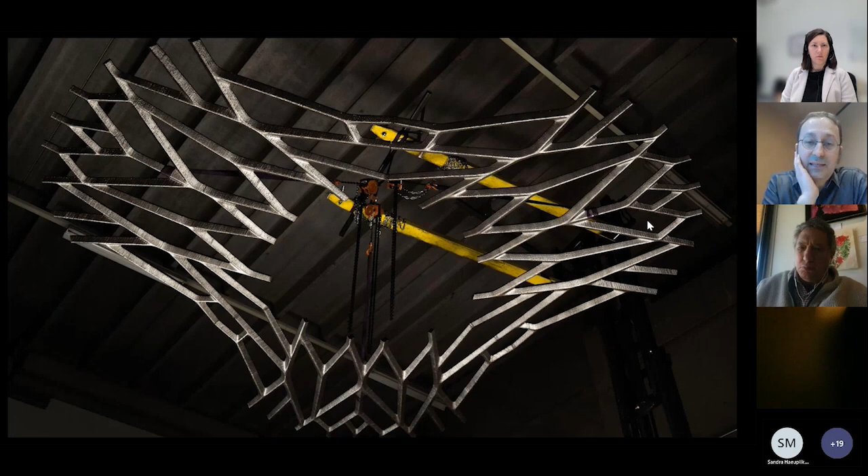It's pretty beautiful material, and they printed it completely. Unfortunately, this bit was a victim of COVID, where our general contractor pulled out on us at the last minute. But we did still have an exhibit at the Biennale.

And with that, I think I'd like to finish telling my story and see if we have time for questions or conversation. Thank you very much, everybody, for listening to our story about space architecture.